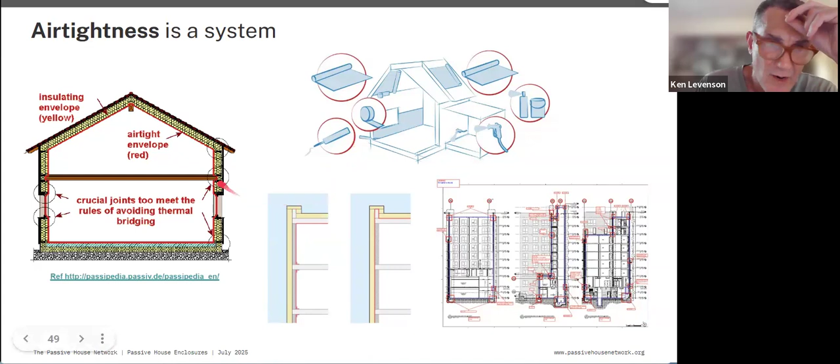The point here is that whether it's inside, as we see in this larger building, or it's going on the outside of the structure, it's a system, and there are going to be a number of parts and pieces, and it's at the connections of one piece to another piece - the window frame installations, the wall to the roof, how we're going around this floor construction - where we want to make sure we have robust connections. Whether the building's a single family or a bigger building, you're looking at all those points and identifying them and making sure that the details are delivering.

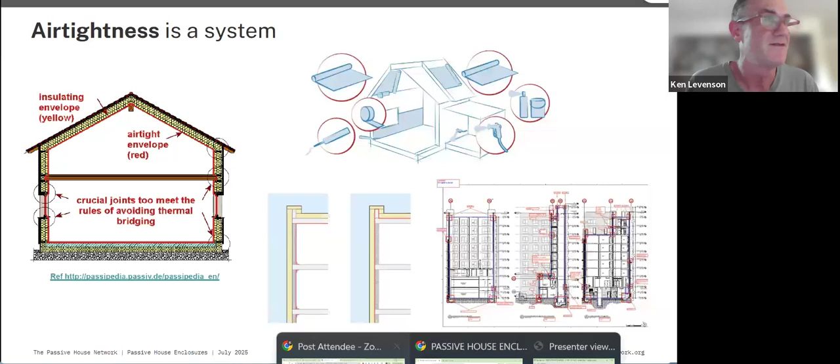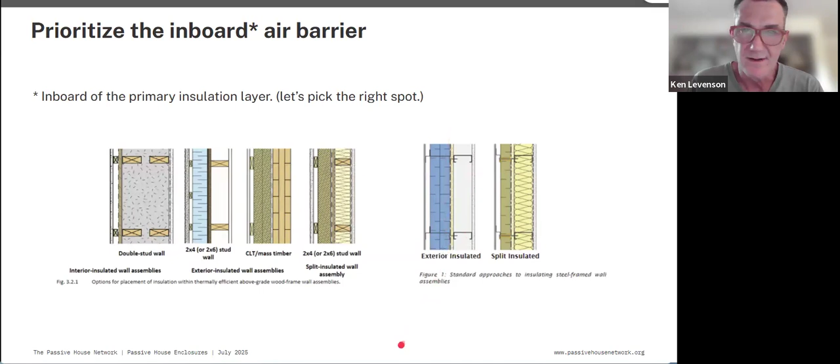Similarly, in commercial construction, we can use the metal stud. We'll talk about this, how it compromises the insulation layer and what we need to do about that. But very straightforward in terms of having the air barrier there, inboard of the primary insulation layer.

So vapor control. One thing I like to say is pretty much universally, forget about vapor barriers. Do not describe materials as vapor barriers. The one place we'll have a vapor barrier is to the ground, typically. So you'll have plastic sheeting. It's going to be a water vapor barrier and an airtight layer to boot.

For the walls and the roofs, as much as possible, we're going to look to be relatively vapor open. We want the building enclosure to be able to dry out. Things can get wet, as we described before. It needs to be able to dry out. It's the moisture getting trapped in the enclosure where the damages really come. They will only dry through vapor diffusion at that point. And so we want to enable that.

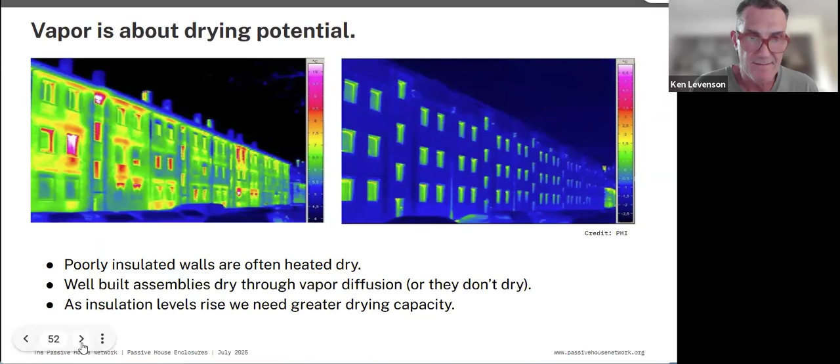A key aspect, in the way to frame it, is that we want the drying capacity to be greater than the moisture stress that's placed on the enclosure. It's a little bit abstract, but we can think about it in terms of the parts and pieces we're pulling together. We're not going to go through WUFI here or anything in terms of doing hygrothermal modeling. A lot of the typical details can be, especially in your climate, well understood to be robust. From the basic kit of parts, you can establish this formula, and where there are questions, you may want or need to have a more specific calculation done.

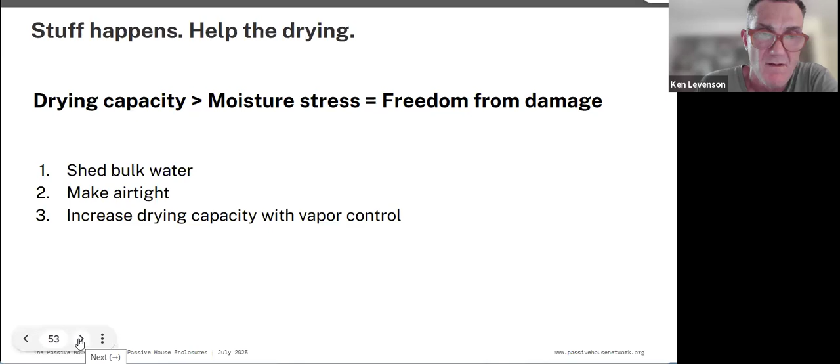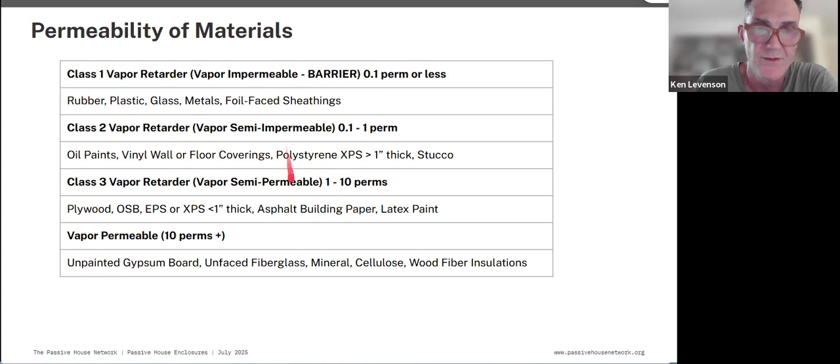So, unless you were talking about the ground, we don't want vapor barriers. There's going to be glass in the windows, and there will be metals and whatnot, but we really want to avoid all of this in the wall and roof construction. There may be vapor retarders. We need to be careful about that, and in tougher climates, more careful about that.

If you have vinyl wall coverings, they could be substantial vapor retarders and trap moisture. If you have a vinyl wall covering on an exterior wall - I've seen it all over the place - it traps moisture. If you peel back that vinyl wall covering, you can have mold behind it.

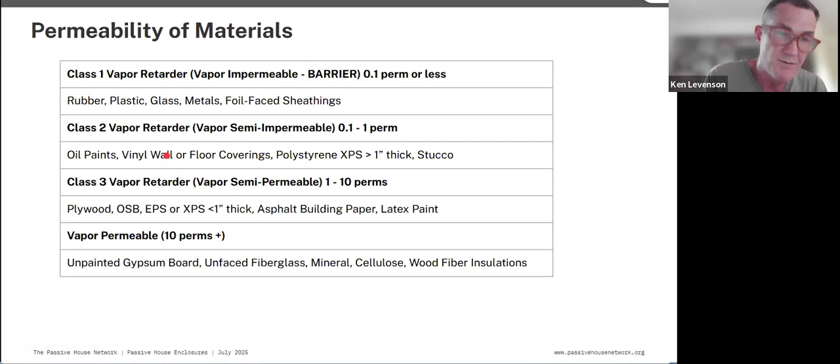The foam insulations will become vapor retarders and vapor barriers depending on the makeup. So we're always pushing towards more vapor open, semi-permeable, and permeable materials. Again, we want to shed the bulk water. We're minimizing the wetting. We want to allow the drying.

One of the things that's tricky - like if you're up in the mountains, you'll have this, I know we have it in the Northeast - is that in the winter, the vapor drive is going out, but in the summer, the vapor drive is going in. And it's like, well, how do we deal with that? One of the things is to just let the vapor move through the construction and trust that it will dry out.

Depending on how harsh the climate is, you may introduce vapor variable products that inhibit wetting in the wintertime. So it's retarding the vapor, and on the exterior side, it's vapor open.

In the summertime, we may want to have vapor retarding on the outside. So in a hot, humid climate, we're looking to put vapor retarding on the exterior. In a cold climate, we put it on the interior. In your climate, it's pretty easy.

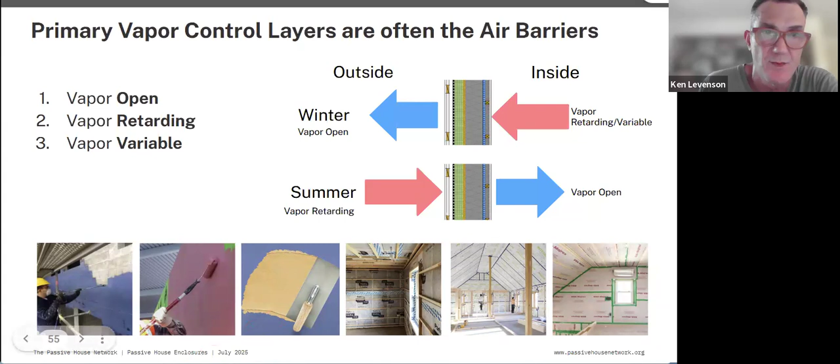Insulations. We can use any type of insulation in passive house. When we're looking at the drying potential of insulation, the fibrous insulations are definitely much more helpful. The natural fibers like dense packed cellulose and wood fiber are probably the most robust, in that they can take the moisture, hold it, and actually move it to drier locations, increasing the drying potential of the enclosure.

So you may think of cellulose as a potential liability in terms of moisture, but it adds quite a lot of resilience. We can't dunk it in water, it can't sit in a puddle, but with normal moisture flows or a minor leak, as long as you get to the leak, it will dry itself out, assuming nothing else is getting in its way.

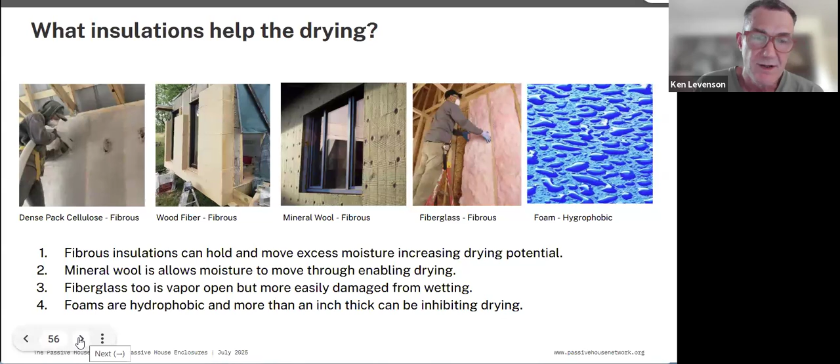Mineral wool is great for allowing vapor and moisture to dry out through it. It's not engaging the moisture in the same way as the natural fibers. Similarly, fiberglass is good. Foam is hydrophobic, you can use it, there's no inherent problem with it. You just need to be more careful and know what you've got, and you may be in a position where you need to do a WUFI model to understand what's happening. But then again, there are well known buildups around that.

This chart is a lot, but I think it's good for reference as we're looking at the different climate zones. We're looking at variable inboard vapor control in a cold climate and open outboard. In a cold and warm humid climate, it's variable. Open in hot and humid, and open in dry climates. Fibrous insulation across the board, and really where it switches is in the hot and humid climate, with outboard vapor control. We want to have it retarding, so we're not getting exterior humidity into the enclosure and into presumably cooler interior spaces, where you could have condensation issues.

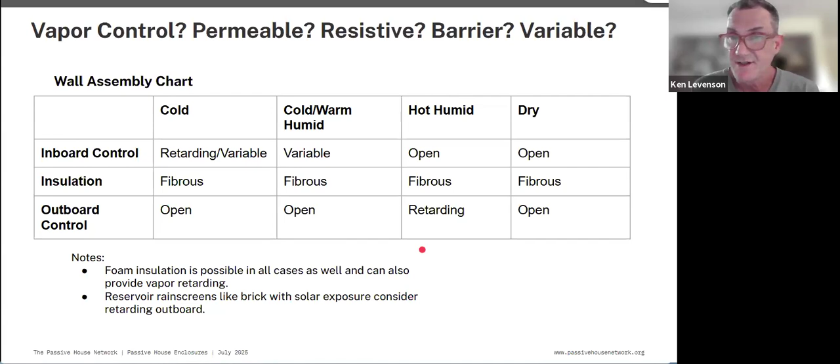On the roofs, you're going to be able to do the insulation just within the cavity. It's always better to have continuous insulation, and where we can do it, we want that above the roof rafters. We want a service cavity below the interior air barrier. We do want an interior air barrier at the roof; we don't want to rely on the roof deck. If we are going to rely on the roof deck, we want to have insulation above it sufficient to know that it's going to stay warm.

Again, you're in a forgiving climate, but these are still basic approaches. A cold roof is a great way to do it. You have the basic enclosure with the membrane on the roof, and then you have furring on top of the roof deck. I don't have a diagram of that for some reason, but this detail sort of shows it. You've got furring coming down here, you can see the furring strips at the end there, and then they're applying another plywood roof deck and the roofing on that.

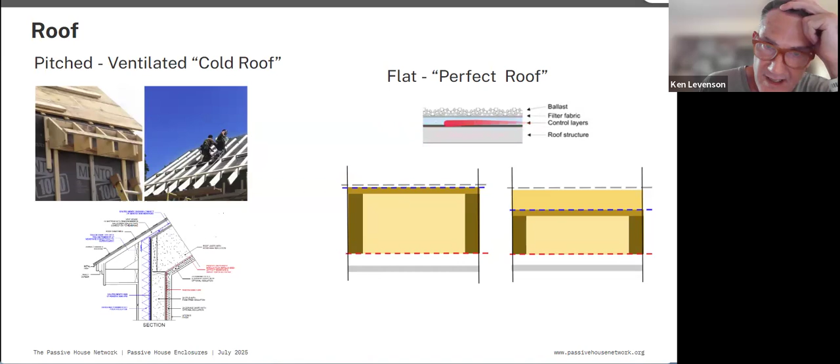So that cold roof is a back ventilated roof, like a rain screen on the wall. It's applied to the roof, kind of like flipping that perfect wall around. The Building Science Corporation's perfect roof is the straight up commercial construction approach, where you've got the water barrier, insulation, and ballast. Thermal control.

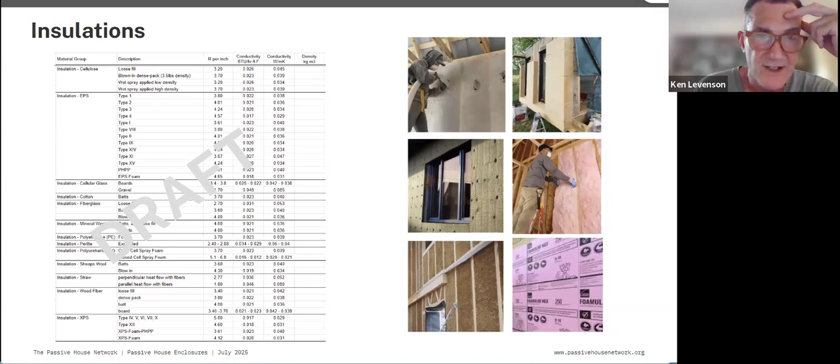The insulations, again, I don't need to really go into this. I will say we're developing a standard and manufacturer specific guide, across a wide range, to conductivity values to use in Passive House, simplifying initial calculations and hopefully making that more robust going forward. The big idea here, and one great reason to use wood construction, is that where we have insulation in framing cavities, the framing can play a big role. On the left, the nominal R value of the insulation is 22.3, but the actual R value is 19 — so we've taken a bit of a hit there. On the steel stud wall, we're cutting it in half.

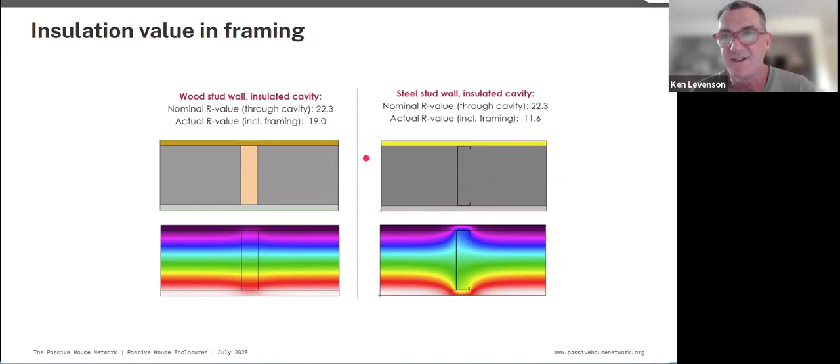We still see examples where people are insulating metal steel stud cavities because they need that little bit more of R value, and it's okay to cut it in half. It'll give them enough because for one reason or another, it's easier than just putting it outboard. I mean, why not get rid of this insulation and just get the full value outboard? It's really undermining it.

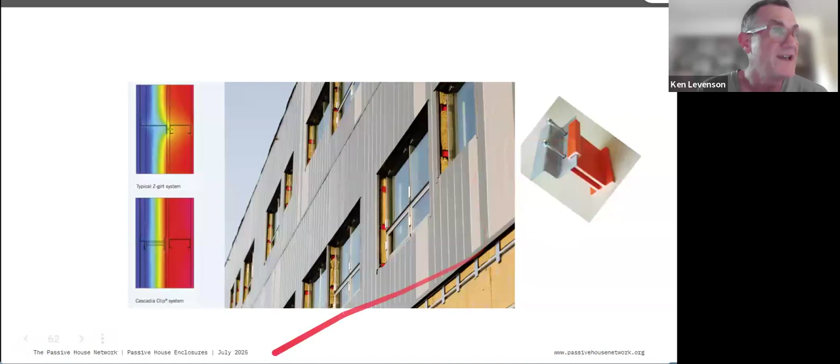And it's one of the big problems we have with larger scale construction, rain screen construction, where the typical clips and Z-girts are undermining the performance of the enclosure. And so in a Passive House, we are really looking at these. This is a great study by Steven Winter Associates, done on many larger buildings, looking at standard products for girts, for clips,

and showing that the thermal efficiency is half using these. It's cutting the thermal qualities as much as in half. It's making the insulation a sieve, whereas we can change the materials, change the sourcing, and maintain the vast majority of that insulation value. So just the specification is going to be super important.

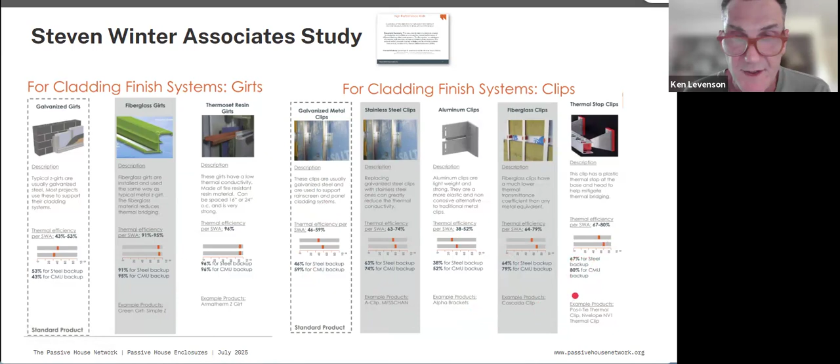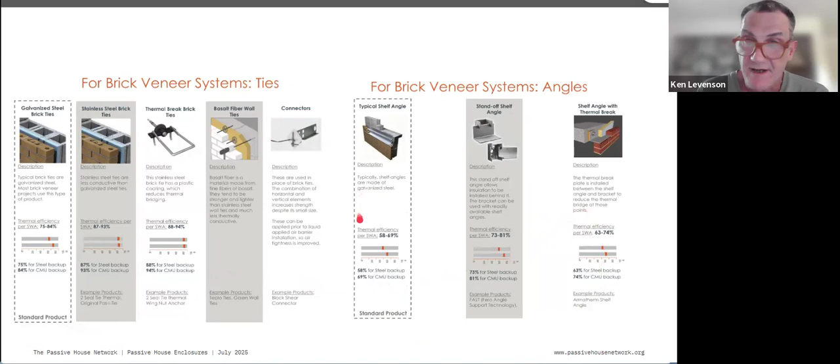And it's great, there are more and more options out there. So similarly for the clips, you see the typical, like down at a 50% loss, and we can do much better. And it's different if you're on a steel backup or CMU backup. This is obviously looking at commercial construction here, but I think we can apply that to residential as well. Brick veneer ties, similar story, although these are better for the standard product. We can do better. And for the angles, we can do much better as well.

These things in terms of thermal control, it's the thermal bridges at all these connections that's undermining it. It can account for 20 to 30% of the heat loss. And it's why mechanical engineers oversize mechanical systems, or one of the reasons why they quote unquote oversize them, is because they don't believe that the building is going to perform, right? Nobody has confidence that all the detailing is there and they have control of the environment.

They need to allow, sort of CYA, to cover bigger swings in terms of what might be possible. We're looking to, throughout the design process, identify all of these locations of potential thermal bridges and put in conservative placeholders in schematic design. We're doing an energy model in schematic design and running it and seeing where the overall numbers are, where our energy budget is, and then start to dial it in. And we start to dial in the details at these potential thermal bridges in DDs and CDs for sure. And we want to leave a buffer.

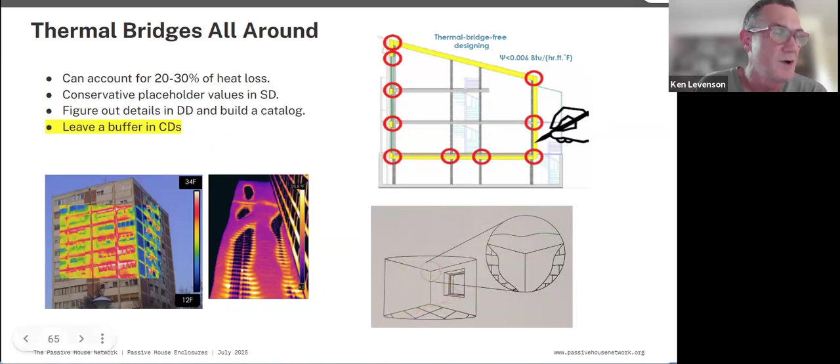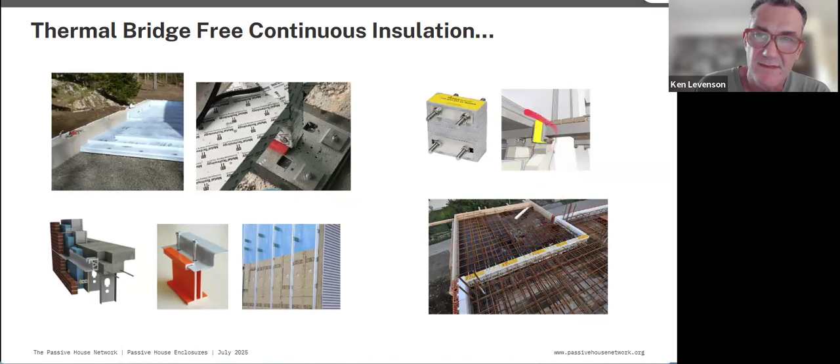Some examples of different breaks. There are fabulous structural breaks now, going from inside to outside, and balcony connectors, and awning, canopy, cantilevers, and all the rest of it. No gaps, talked about that. Prevent wetting. Help the drying. So let's talk a little bit about

just efficient design and how Passive House makes us think about it. You can have a really complicated volume, much more complicated than this. And when you're in easier climates, it can be more complicated. So I keep saying enviously, in your relatively easy climate, you can be a lot more adventurous in terms of the forms that you're using, and not pay that big a penalty. But it's really important to note that as you are adding complexity to the thermal enclosure, the surface area of the volume, you're adding to the energy budget and you are adding to the need for insulation and being more robust in different ways.

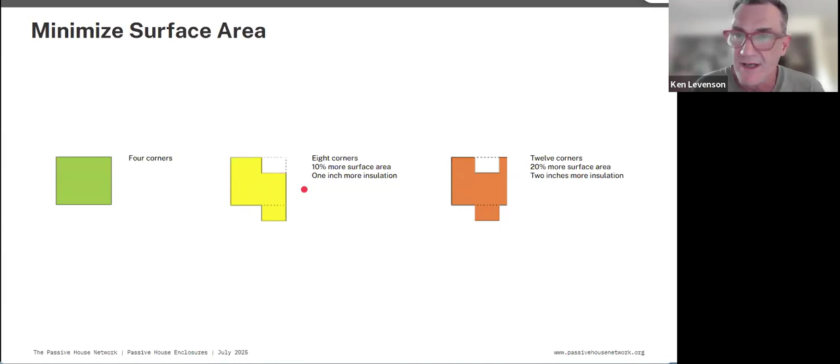A key aspect, as we say: articulate the skin and not the thermal enclosure. So like, there's one is not like the others. The Palladio Villa Rotonda in Italy, in the upper left, is as close to a cube as we're going to see, for many buildings and classical buildings, but it's still the skin is highly articulated, principally with the porticos.

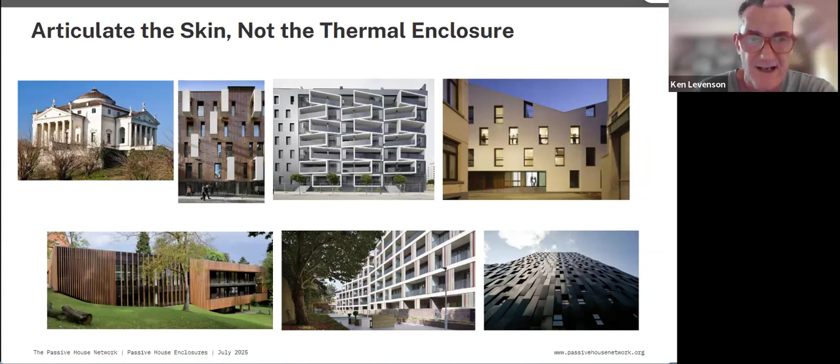And we see that with a number of different building types here. Well, these are multifamily, but ways of doing that. And it's finding that synthesis of beautiful form and simplicity and performance - what's inside and outside - in the sense that you need to have really clear... and this is a big building, but it's true for any building... what is the thermal boundary?

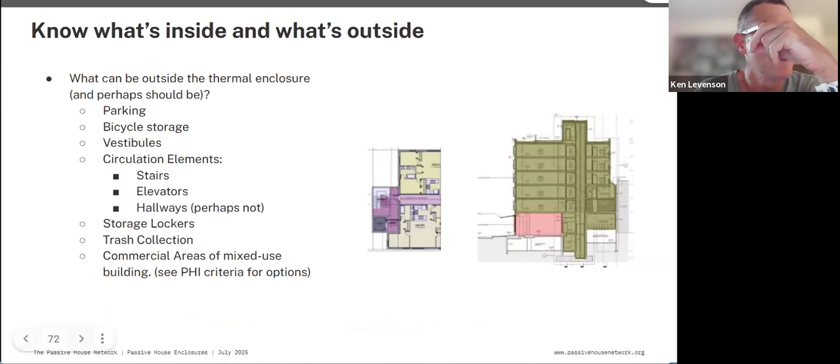Having control of that is really important. In the efficient form, sometimes, especially when you're a passive house consultant or designer, you may be given a design that hasn't been optimized. You may not have a lot of control.

That can make the project more expensive and more technically difficult to execute. But if you start at the beginning of the project and work through it, making choices that make the form more efficient, it's going to be easier. You can still make this a passive house — there's no prohibition against it — it's just not going to be as easy.

You can do a balcony that's inset, and there are lots of passive houses with these inset balconies, but one that is set out here is much simpler in terms of dealing with the thermal bridge, the control layers, and the constructability — all of it is more straightforward.

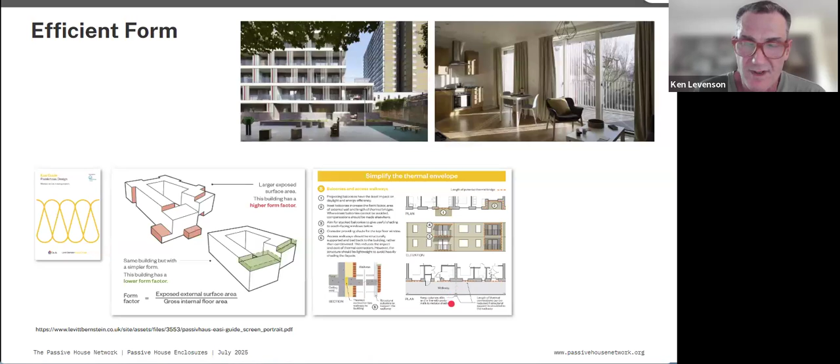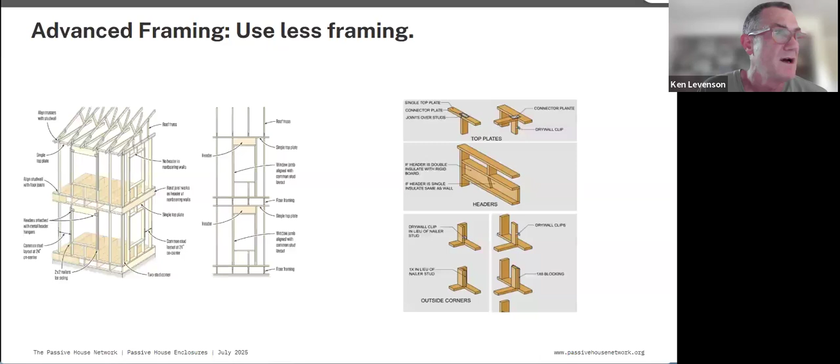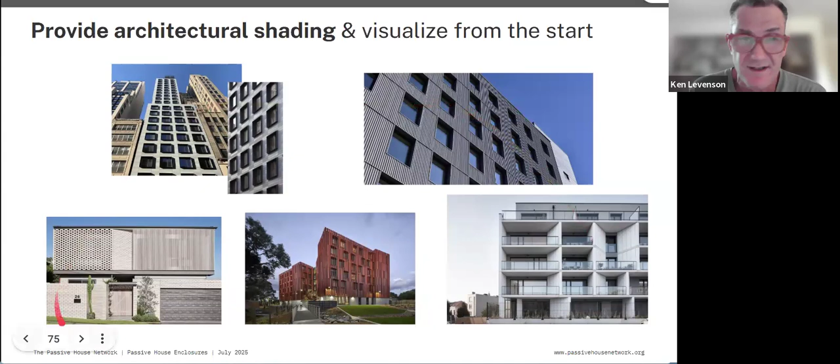We want to kill bad balconies. Balconies are something that's always added — people need to have a balcony. But the problem is they're often not deep enough, not big enough to actually use. And they often end up, worst case scenario, just being an exterior storage space.

When we look at the enclosure, balconies are a big deal. We need to deal with a whole bunch of issues around thermal bridging, structure, and performance with the envelope. Let's make sure they're really good balconies that people are going to want to use, or let's not do them at all.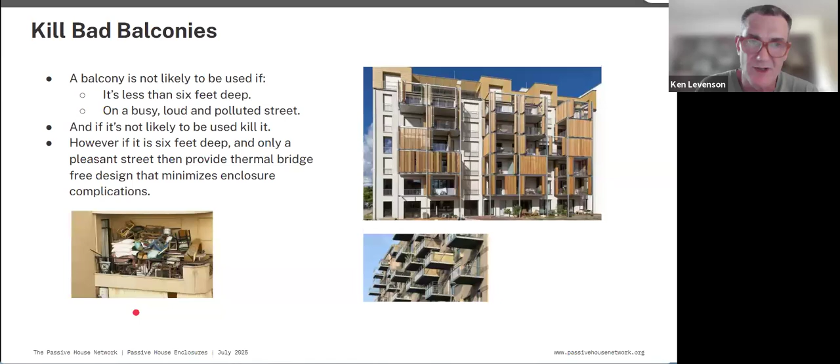Windows are really interesting in that people think, oh, you're going to have tiny windows, or you're not going to have daylight, or views, or you can't open them. All of these things are not true with passive house. Passive house is absolutely about bringing in daylight, views, connection, and natural ventilation when you'd like it.

The key thing is that windows really need to have a purpose. We're not typically just wrapping the building in glass, because from a comfort and performance perspective, that's really bad for the occupants — there's glare, overheating, discomfort. So passive house asks us to really consider it. You can do a building wrapped in glass, and there are passive house buildings wrapped in glass — it's not the cheapest way to go, and you need to do a lot to mitigate that, but we can do this.

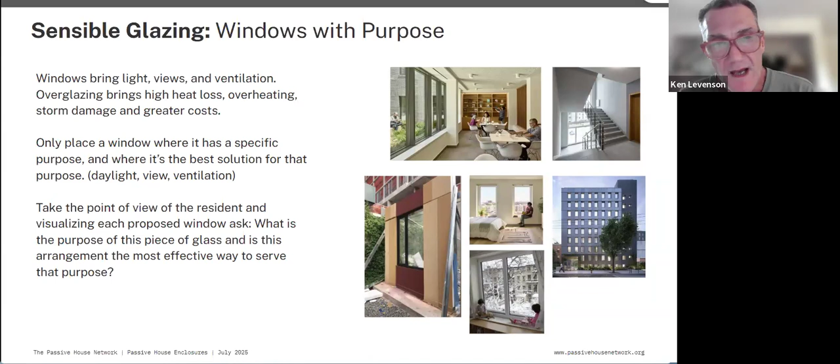The key thing when we dig further into windows is again this idea of simplification — what can we do to make things easier or harder. In a passive house window, the frame is the worst performing part of the window. So if you have a bunch of small windows, you have a lot of frame in proportion to the benefit you're getting from the glazing, making it a relatively poor performing window. As you go to bigger windows, they perform better.

If you have fewer but bigger windows, you're going to have a strategy for a higher performance enclosure rather than many smaller windows. You're also going to have fewer openings to deal with. And if you have a large opening, we typically don't want to subdivide that 100 times.

You can do this in a Passive House, and there are many Passive Houses that do this, but these frame divisions are really degrading the performance of the window. You're adding cost and complexity while lowering the performance. So it's really asking you to strike a better balance.

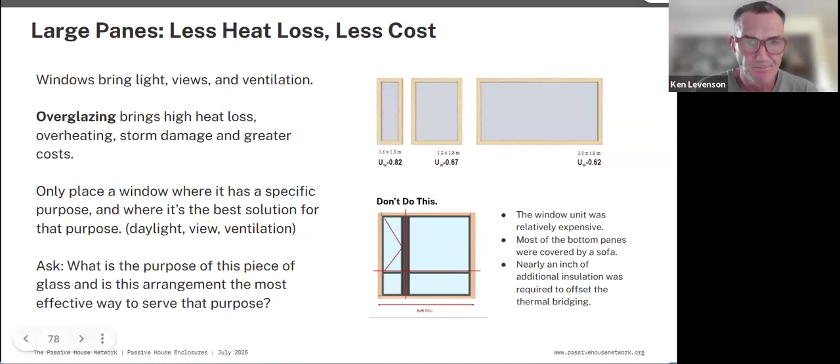There are all kinds of windows that are a lot of yeses here. These are certified windows that are provided, and then windows that aren't necessarily certified. This is the type of information you get with the certification of a window. You go into their database and look up what climate it's appropriate for, and you get different values for installation and different configurations. There's more pages than what I'm showing here. A lot of great information, and it does come right into the PHPP.

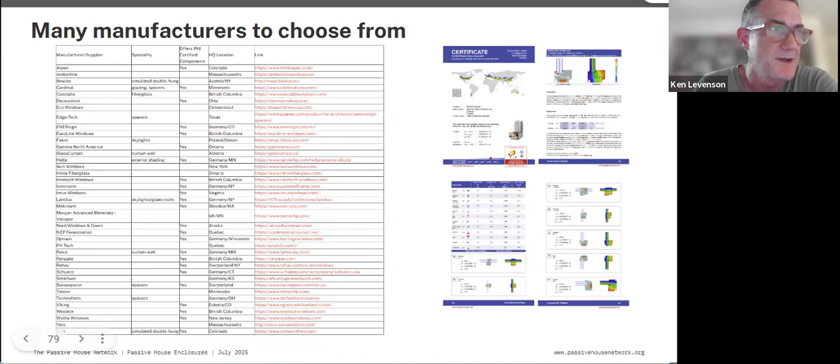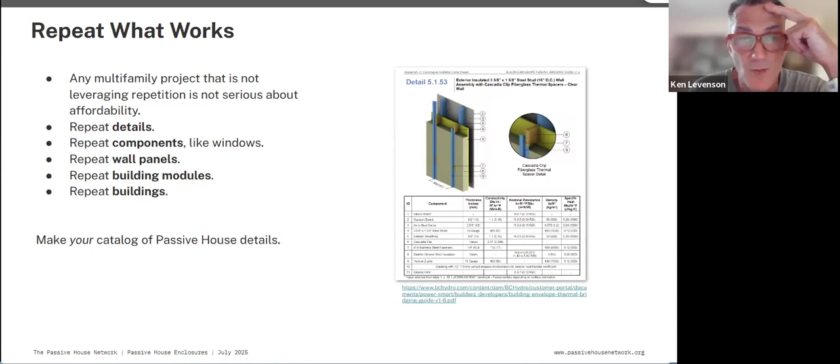I'll say also, repeat what works is a mantra. There's no magic here. Architects and builders like to repeat details and components that work. And it's really important that we, in the Passive House world, do this with vigor as well and make it as simple as possible. So let's look at some details.

There's some more comments here. How important is it to do a dew point analysis when locating the vapor and air barrier? I'm confused. The vapor barrier is on the outside and the air barrier on the inside. How does the location of the dew point change? Hot, cold, warm, humid zone.

So no vapor barrier on the outside, we'll say, Francis, and the air barrier ideally on the inside. So your WRB is going to be vapor open, or vapor permeable, or slightly resisting, but it's still going to allow drying outward. It's going to be waterproof. So something can be waterproof and vapor open. It can be airtight, waterproof, and vapor open. There are all kinds of materials available today to do those things.

Essentially, where you have a relatively moderate climate and you don't have vapor barriers or seriously vapor resistant materials, the air barrier could be pretty much anywhere. We want the air barrier inboard of the primary insulation layer, however, just to keep the conditioned air in the conditioned space. If your air barrier is outboard of the insulation, your conditioned air is always going out to that air barrier, and it's going to be heating or cooling the insulation, which is a thermal barrier, but we want to maintain that control.

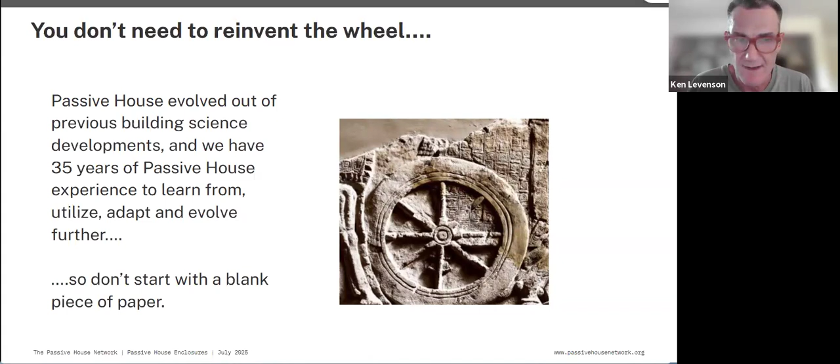I think it's important to say that passive house is kind of new in that it's a thing, but again, it's basic building science rigorously applied, so we're just using the same old building science. Maybe there are some new insights, but there's a lot of things that have been done. You don't need to reinvent the wheel. You don't need to come up with a breakthrough of how to do something. Don't start with a blank sheet of paper. We can keep it simple. We can learn from experience.

This is the first modern passive house. It was built as a science experiment in Darmstadt, Germany. You have a masonry construction, with foam insulation outboard of it and stucco insulation. So you can see the masonry, the foam, and then they stuccoed over that. It's pretty simple. They had to customize the windows and the ventilation system. The air barrier was inboard of the structure, the plaster finish on the inboard.

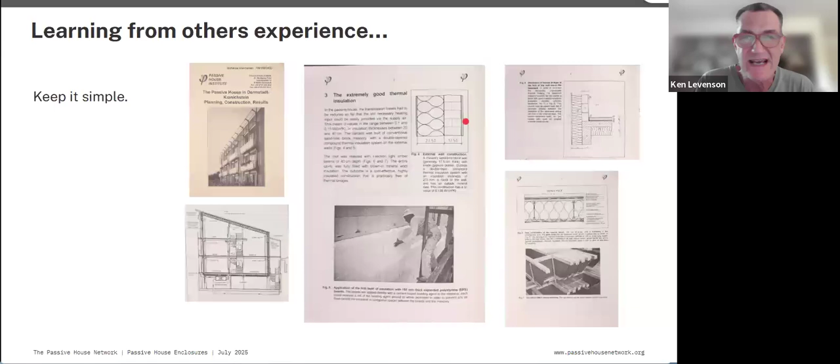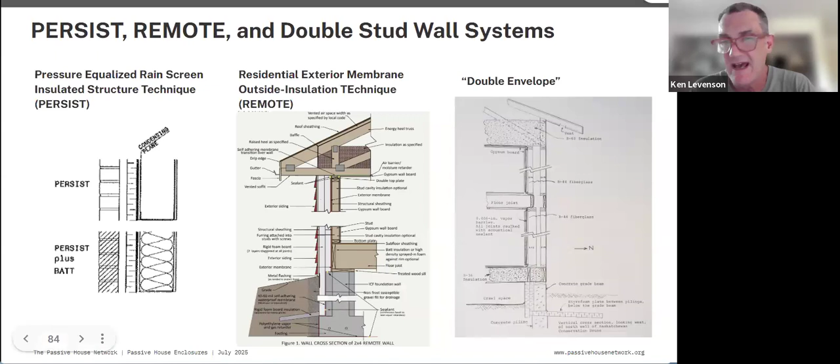Double envelope was developed during the oil crisis, which we call double stud construction. These things have been around quite a long time at this point, and we are building on and refining just what they have done.

A lot of the really accessible refinements we can find on our manufacturer's directory in these under-enclosure systems. Here's a whole bunch of companies that make panelized construction, and here's one company and their set of basic details for a project, with the basic components and how they're coming together.

It's really interesting, kind of a variation on what we've been talking about. This is the structure, like the plan view of a corner, which is stud construction. Here's stud construction on a platform framing, and then another stud here.

They're using I-joist outriggers, so they need a really thick parka here. They can't just use the stud construction. In your area, you can literally just turn this stud construction into the insulation layer, but they're using I-joists to create a big puffy parka.

These companies all have systems worked out, and the ones with yeses have them certified by the Institute, with a whole lot of information about their performance, their connections, and what's possible. I definitely encourage you all to take a look at the resources these companies have out there.

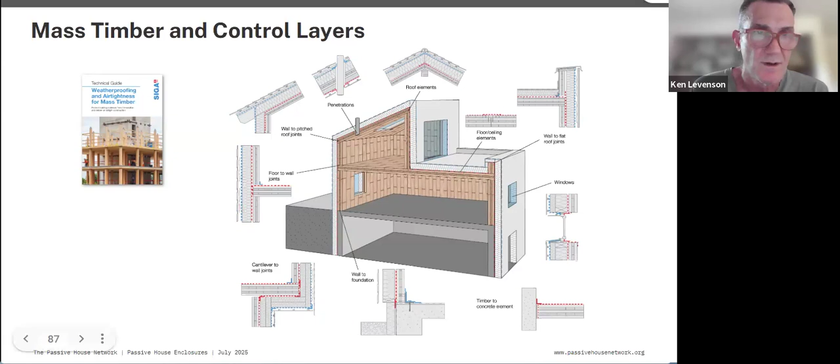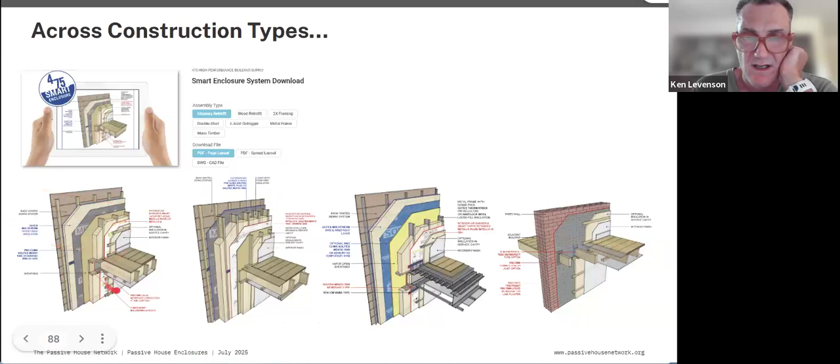Here it's just showing an insulated cavity with sheathing, membrane, and then continuous insulation and a back vented rain screen. On the inside of the stud, you've got an air barrier, service cavity, and gypboard. So this is kind of a typical buildup.

Essentially a similar thing: structure, insulation, airtightness, waterproofing on the exterior face, insulation, rain screen, structure, service cavity, finish.

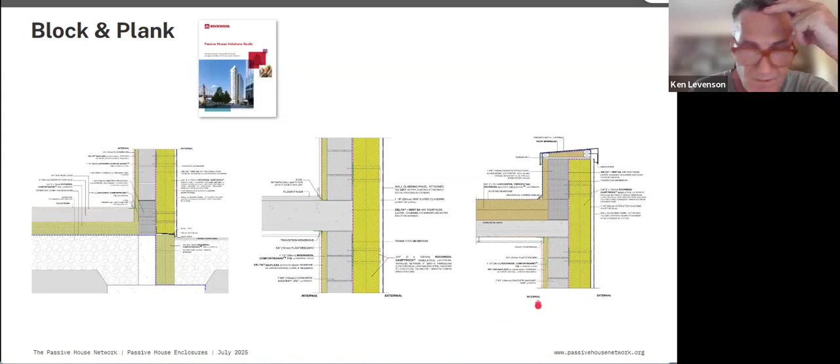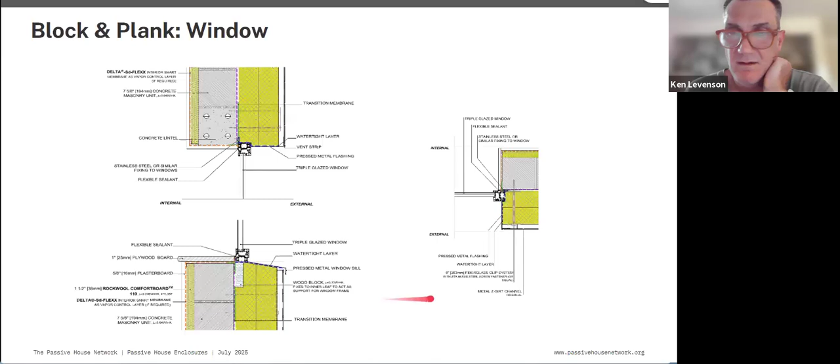Usually at the sills of a window is the toughest part to have really good thermal quality, and this joint is usually that weakest link, where we're looking at that and where we may do a thermal bridge analysis and zero in on it. But the components are quite normal in a way.

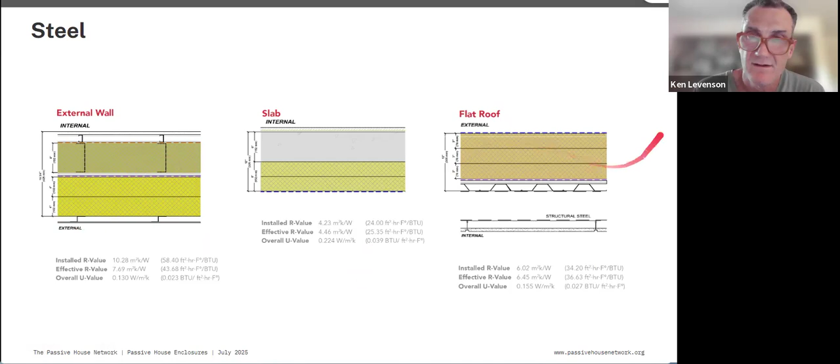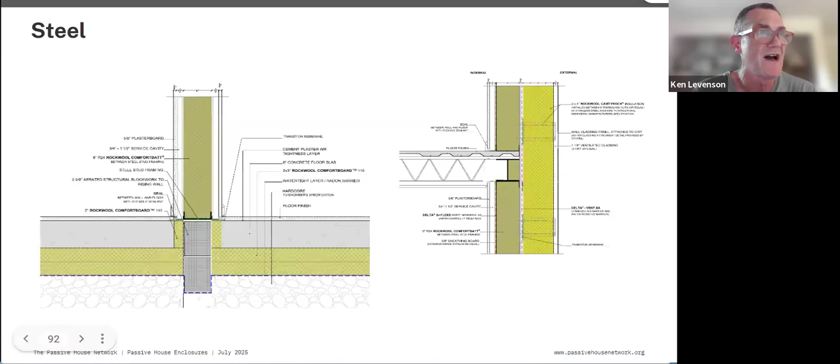What else do we have here? Steel at interior bearing walls coming through, how we're dealing with that around the perimeter. I-joist. Steel construction is a kind of a whole other animal, and we're not really geared to do that here. But I did want to show these so you'd have them for reference and know about the reference and be able to come back to them.

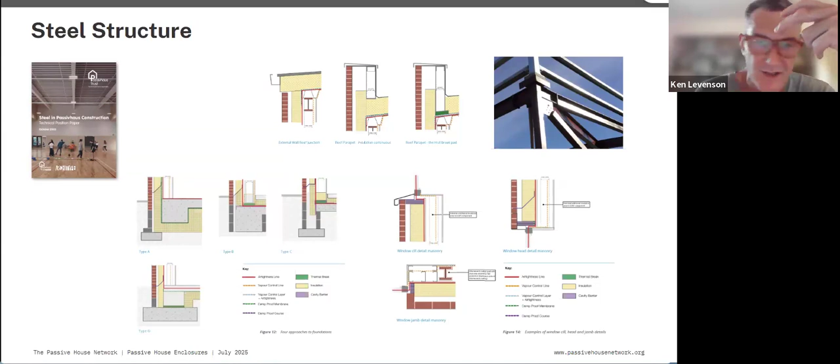This great brochure - well, it's more than a brochure, a guidance from the Passive House Trust, the Passive House Association in the United Kingdom, led by Archetype in producing this. And it was based off of a school that they did in Scotland, really looking at all the different configurations and issues and working them through. So it's not like we have to do wood construction. This is possible. It does require a bit more thought.

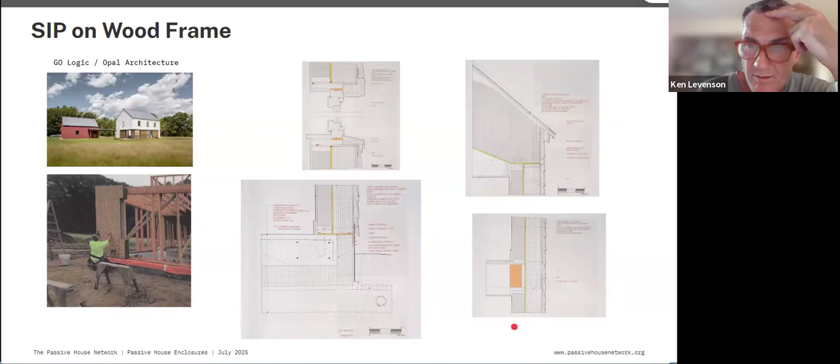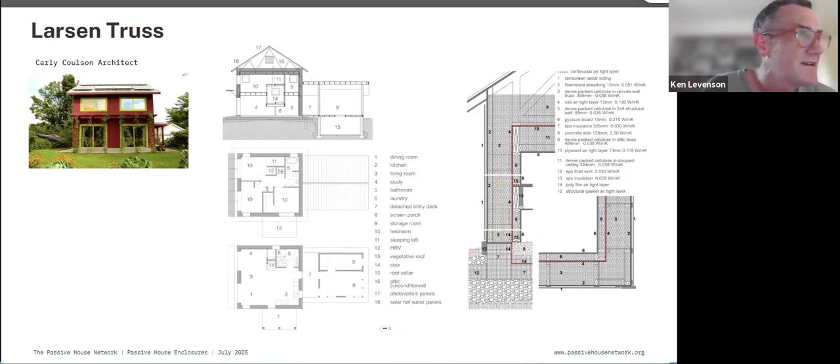They've got the frame construction, they're going to have sheathing here, they're going to have the air barrier here, and so this is the conditioned space here. Outboard of it - I think it's better to see here - this OSB is that sheathing on the wood frame construction, but then this, rather than using I-joists as ribbing, they're using little outrigger pieces of wood made to framing that carries it in a very light way. And you can get very deep construction with very little structural material.

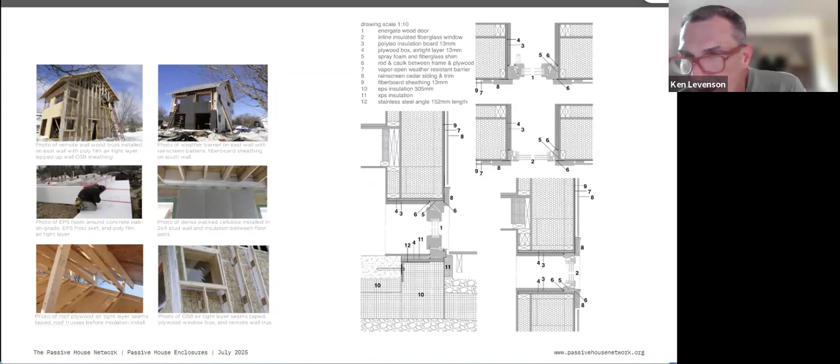These project details are in the database online from the Passive House Institute.

And it's always coming down to these connections. This is really nice in that the insulation is overlapping the frame. So we said the frame is the weakest point of the window - we want to minimize the exposure of the frame. The glass is good, and the glass is getting better - I see Chris here noting that glass is getting even better. We like that. The frame is the tough nut to crack, to be sure, and those are getting better too, but everything we can do to minimize it, the better. So having that insulation come over the face of the frame, where the distance between the insulation and the glass is minimized, is way higher performance and a huge benefit to the overall energy balance and resilience of the building.

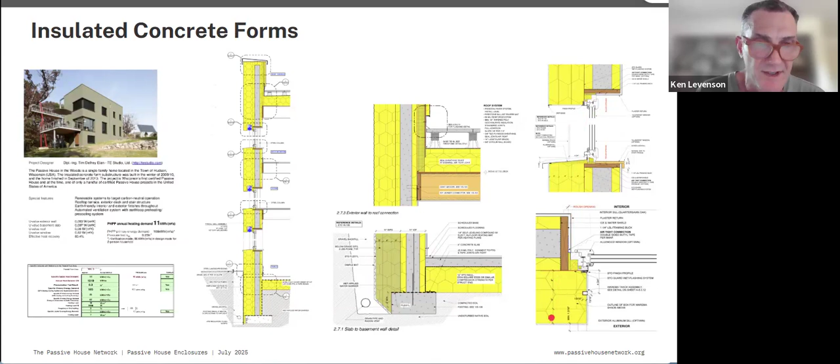Couple of just final thoughts here on this, in execution. We can do site-built passive house - it's great, and a lot of great contractors doing great things. This is not a plug, but Danica and I, before we started this conversation, were just waxing about how much we loved Mike Horgan, and the work that he does out of San Luis Obispo.

And there are a lot of great contractors there, and a lot of great contractors up and down the coast in California and across the US. They're really capable of doing this stuff, and we love to see them take it on because they're made for it and they can really make it work, whether it's small or large.

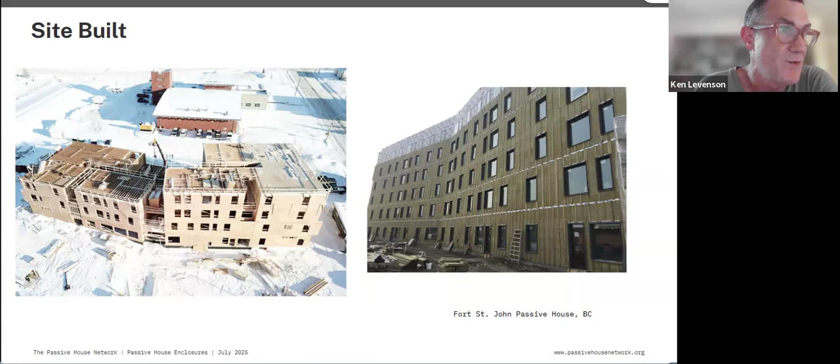And that's going across the country. So yeah, there we go.

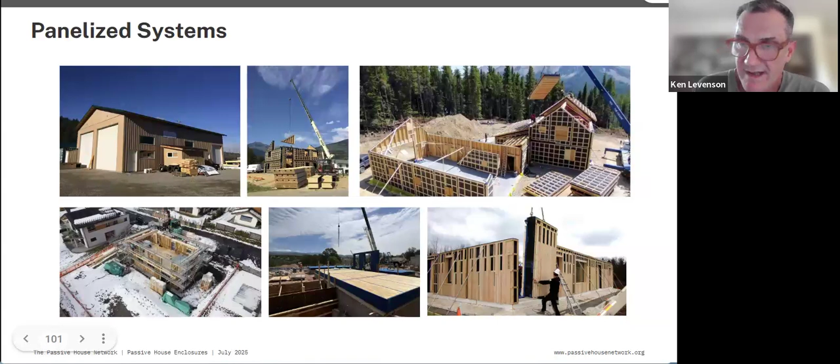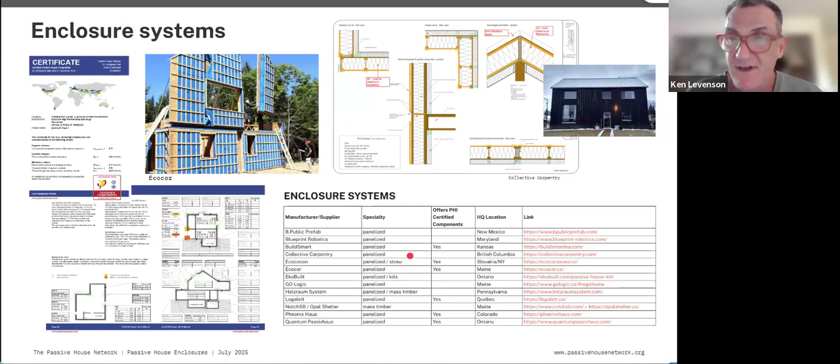To repeat myself too much here, but it's about the systems, and you don't need to use these systems. You don't need to use passive house components. These different aspects just make things easier. At the very least, I'd say dive into the different components and systems to learn from them and the different projects you're going to see, and I encourage you to visit passive house construction or finished projects whenever you can. I know it doesn't happen often, but we like it when it does.

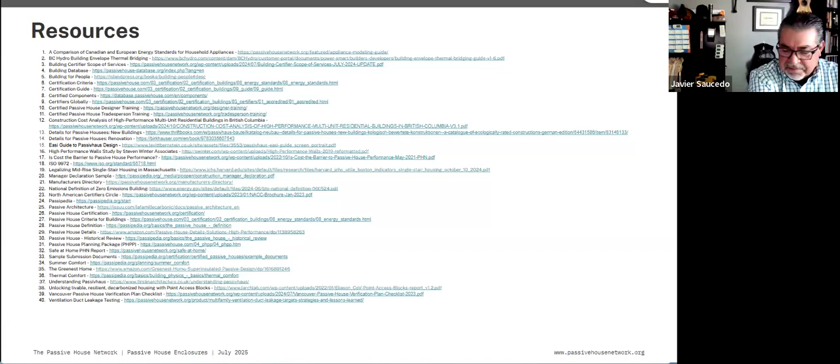Conceptually the roof's either - the space is either in or out. And if it's out, that insulation on the roof is doing nothing. Yeah, all right, that's what I thought. All right, thank you. Anything else specific like that?

Yeah, we have some comments on the chat - Finley Verity said probably the high performance attics in the California building code, and Patty Kloss also said it's code requirement to vent an attic.

Well, yeah, if it's not - I mean, if it's out of the thermal enclosure, then you're venting it, right? So what we're saying is actually to make it part of this, it's no longer an attic. If you bring the roof into the thermal enclosure, it would be defined differently at that point. I could look it up. It's a little bit outside of my daily attention, but definitely important to look at.

Any other questions?

So, I mean, for a wall build up, yeah.

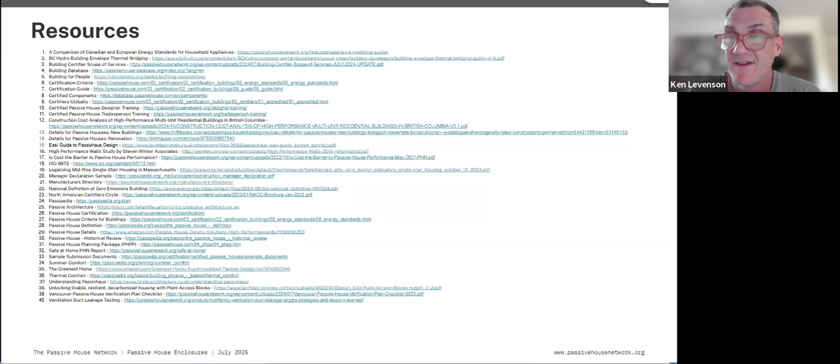We'd like to promote this opportunity to get passive house tradesperson certified. 3C-REN is offering a passive design build bootcamp from September 29th to October 3rd in Ventura, California.

If you are a builder, an architect, or a construction professional, this course might be for you. This training is completely free for those within the counties of Santa Barbara, San Luis Obispo, and Ventura. If you're outside the Tri-County region and still interested, there's also an option to purchase this training.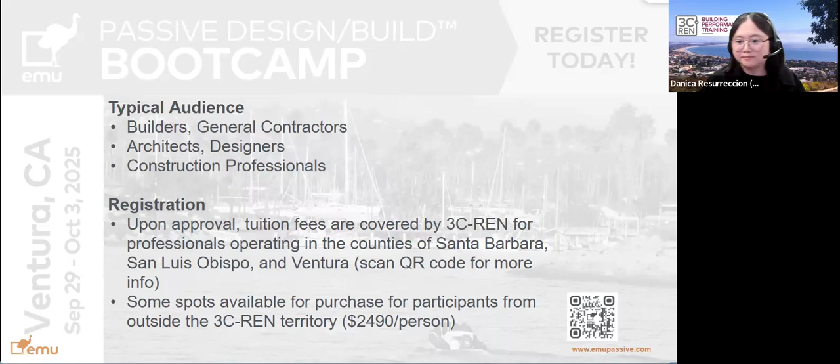There are two formats for the bootcamp: one in person, one hybrid. For the in-person format, all 5 days will be in person, with a building science course the first 2 days, a hands-on workshop the next 2 days, and the exam on the last day. The deadline to apply for this format is September 19th.

The other option is the hybrid format. Instead of doing the building science course in person the first 2 days, you have the option to do it self-paced on demand, then the hands-on workshop and exam are in person for the next 3 days. The deadline to apply for this format is September 1st, a little earlier so you have enough time to complete the building science course on demand on your own. If you have any questions regarding this course, I'll drop Enrico's email in the chat.